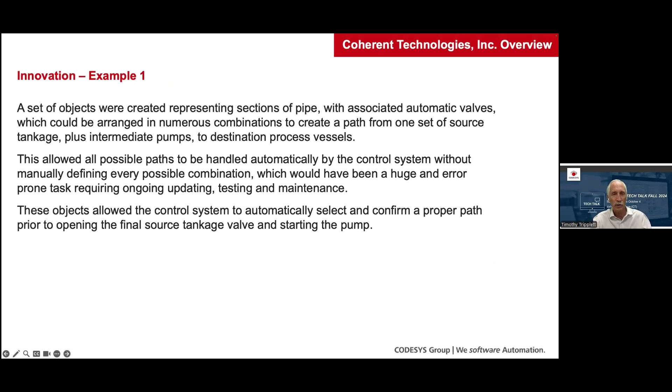I have a couple of examples where we used his object-oriented techniques with sections of pipes, automatic routing of fluids between different sources and destinations. I'm going to go through this very quickly just in the interest of time. And then later, those same objects were extended to prevent isolation of a pipe after the transfer was complete, since these were heated pipes that had burst in the past because of being blocked in without a way of escape. And that all worked flawlessly.

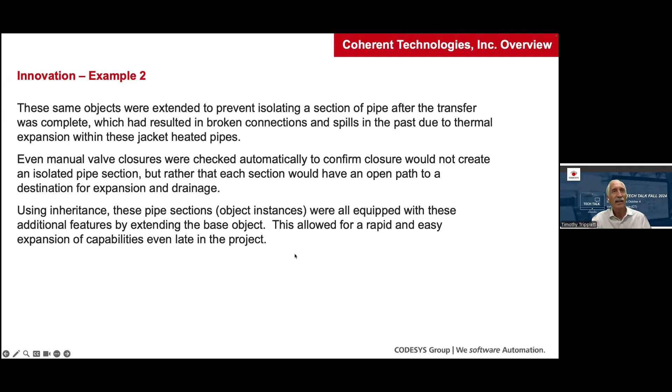And for some reason, oh, there we go.

There it is. Okay, so we're a company of innovation. And this innovation is born out of our inherent love for innovative technologies. And the small modular reactors and the microreactors are an innovative approach to nuclear power that offer many benefits somewhat akin to the object-oriented work that Gary has done, in that they create specific smaller modular objects, reactors, that can then be extended to meet whatever size demand is needed by just adding more reactors.

But they're cookie cutter, built, tested, reproduced, built in a factory, and just pushed out the door for use wherever the power is needed. The microreactors are even truck mounted, so they could be quickly mobilized to a location that had a particular need, such as the Carolinas right now.

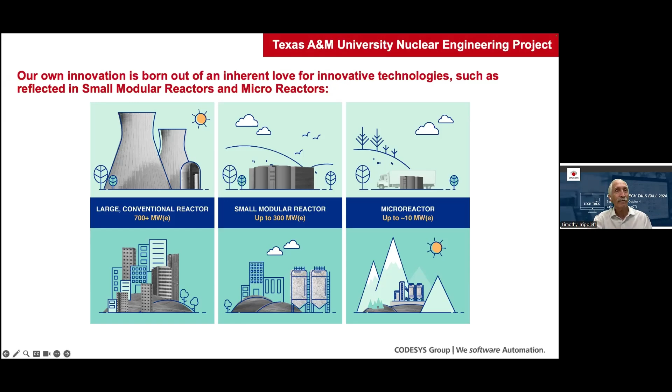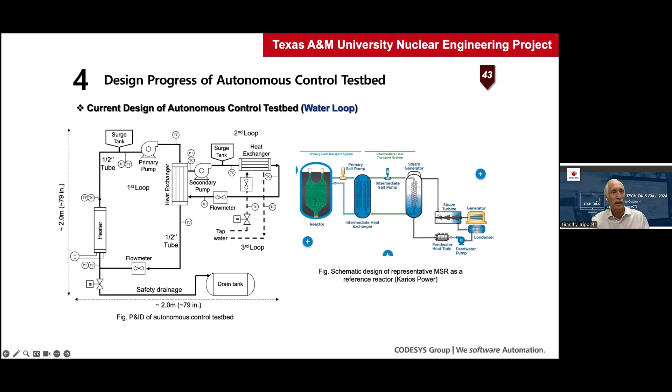And the university wanted to create a test bed to test and verify control technologies and modeling applications and such. So this is just an example of one of their first ones, which is in the process of being fabricated now. The control system is already there, waiting now for the piping and sensors to be connected. And this was their first. Excuse me. This first test bed was a relatively small one, but it will establish the principles for larger and future ones.

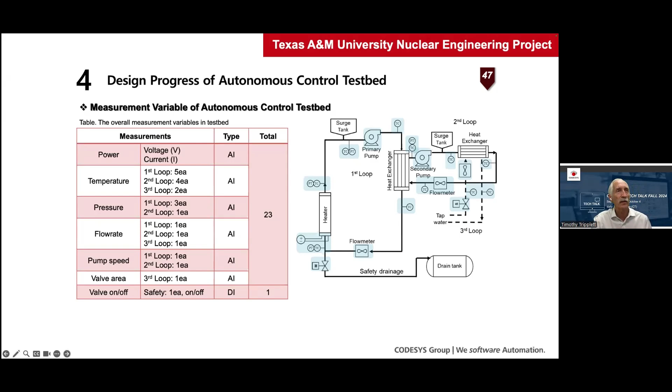So their objective was developing this test bed that can be applied to different sizes of reactors, and as a proof of concept where they can test this in a safe, controlled environment, but in a realistic way, using modern technology and modern techniques for the controls. So they'll have both the physical control platform, a digital twin model that they are creating, and then use that model to make supervisory control changes to the reactor operation.

To reach these objectives, the physical control platform needed to be first and foremost secure, but also future-proof, because we are in an evolving area of cybersecurity, and technology development is not slowing down, it's just speeding up. They needed high performance so that the modeling could be rigorous dynamic modeling, and also support advanced control capabilities. Reliable, of course, that's a critical need in a nuclear system.

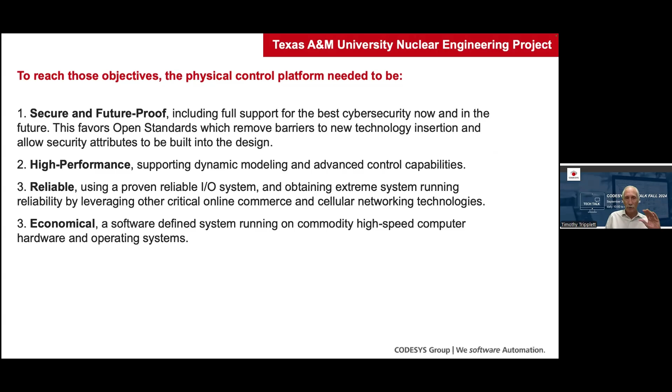But we want to leverage the developments that are already there in the commercial and cellular networking systems, as opposed to trying to reinvent the wheel. And on top of it all, it would be great if it was economical and adaptable by being a software-defined system built on commodity hardware and operating systems.

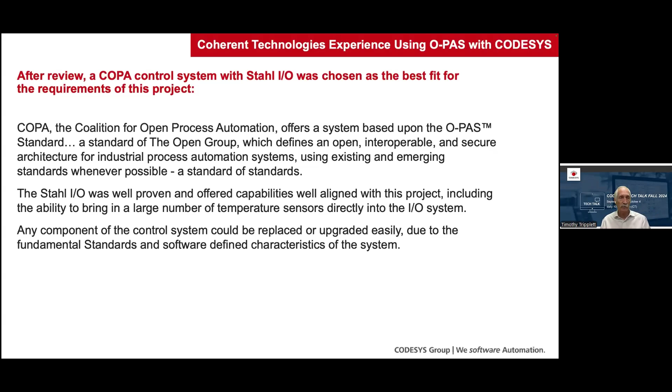So after a review, the COPA control system, using in this particular instance the Stahl IO, was chosen as the best fit for this project. COPA is a coalition commercializing The Open Group's Open Process Automation Standard, who's providing the hardware and the system implementation. The Stahl IO was delivered by Stahl, but any component in the control system, because it is so modular and software standards based, could be interchanged in the future for future designs with very low risk.

To put together the best team for this, we selected CPLANE as the supplier of the COPA system. They're one of the members of the coalition, and CSI, which was one of the founding members of COPA, to provide additional consulting services.

And the IO system is the Stahl IO, but rather than running the logic in the Stahl brain, it is being used as an industrial IO data server, using the OPC UA communication technology to do secure communication to the DCN compute node, which is doing the actual control, running the CODESYS logic.

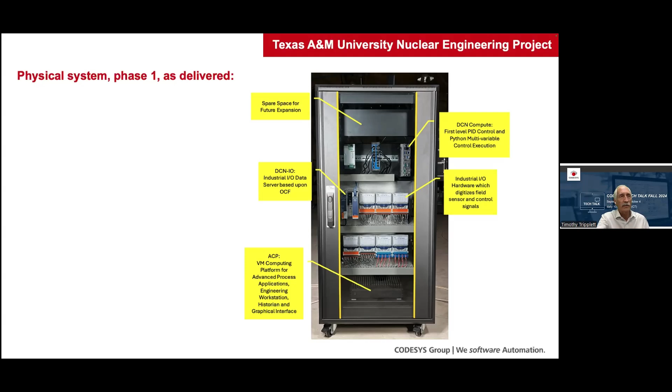Now, this architecture, getting into a few more details, is the IO DCN. This is the particular model of Stahl that was used, communicating with the compute DCN. The compute DCN is an ASRock industrial PC running the Ubuntu operating system and Docker containers, which are running the CODESYS runtime and the Python model that the university is developing.

The advanced control platform is on a very capable Supermicro system which is running multiple VMs for the Ignition gateway, the engineering workstation, and we list the operating systems and choices that were made there. The historian and the GDS, which we'll talk more about in just a little bit. That is an amazing piece of technology in itself.

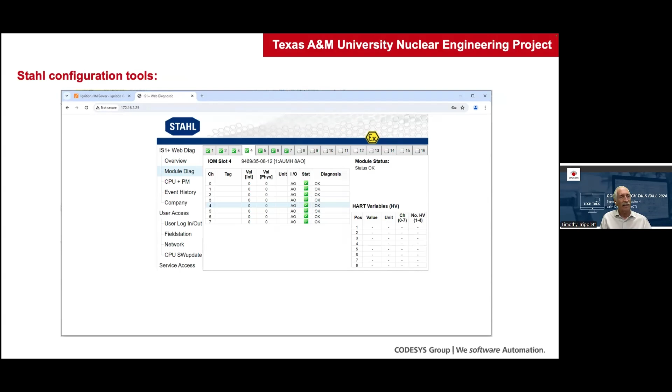The Stahl configuration is a very straightforward, web-based tool, first for monitoring, that you can drill down into to monitor the operation of the I/O, as it's just a diagnostics tool. It is configured using their standard FDT application, which allows you to drill down into specific objects and configure them, all the details related to those.

And then another tool that is used during the course of a project is a tool such as UA Expert, that allows you to go in and monitor or even make changes to specific settings within the, sorry, I'm having a moment here, the open process automation system.

So this is the CODESYS project on the compute-only DCN. I'm going through this very quickly. There are three major sections to this. There are a huge amount of libraries provided by the COPA organization as a part of the detailed implementation of the Open Process Automation Standard that maintain the fidelity and the compliance with the standard.

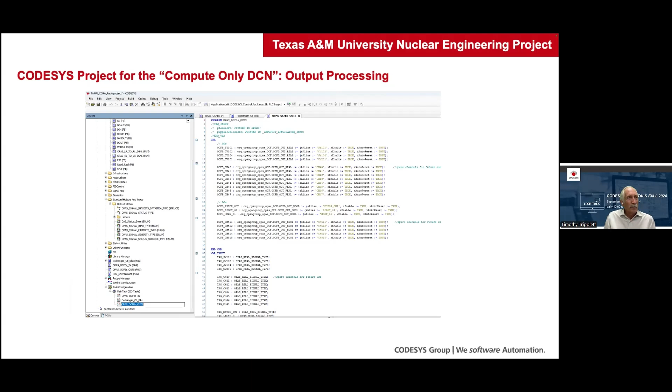Now, where it starts to get really interesting, it's published using, in this case, the symbol configurator, to publish this to OPC UA, which was just as simple as exposing those blocks.

But behind the scenes, the control application development was easy because of this global discovery system, GDS. So I'm going to skip through that.

This gets down into some more details of what the GDS does for you. It meets OCF, which is the Open Process Automation System Communication protocol for secure communication between different nodes. It requires time synchronization and uses IP-based message transport.

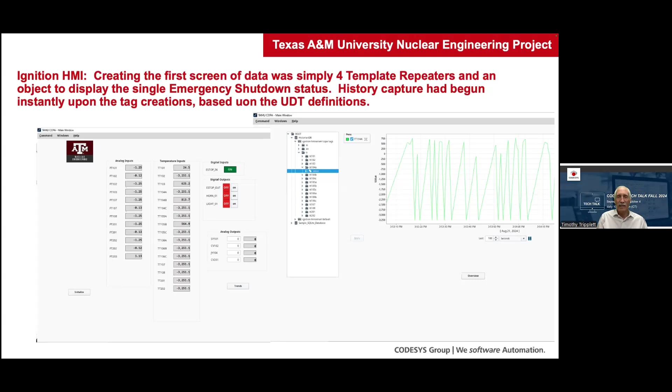This was very much a collaborative effort with multiple parties. The Department of Nuclear Engineering at A&M is managing the Python script and model of their system, working on the digital twin side. Coherent Technologies assembled the system, putting the pieces together. Seaplane provided the physical hardware, the cabinet itself, and CSI is advising A&M on their use of the model and interconnection with the control system.

So that was a very quick blast through that, and I appreciate your attention.